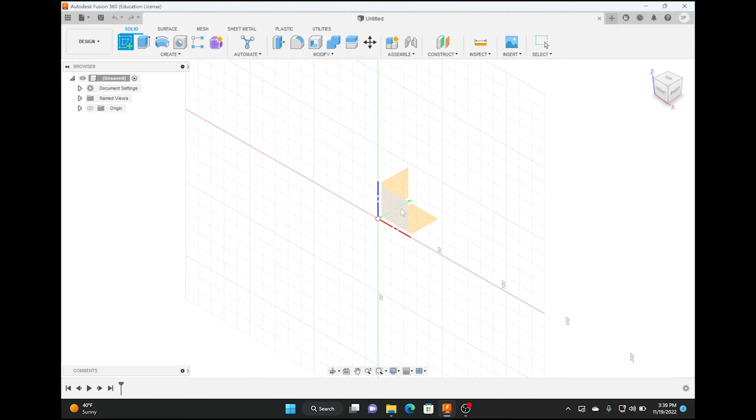First step in creating any design is to create a sketch. Choose a plane, any plane - I always prefer to work on this one for no particular reason. When creating a snowflake, I like to use polygons just because I feel like they look better. I like to use the measurement of 16 millimeters wide as a starting point, and then base every other measurement off of that.

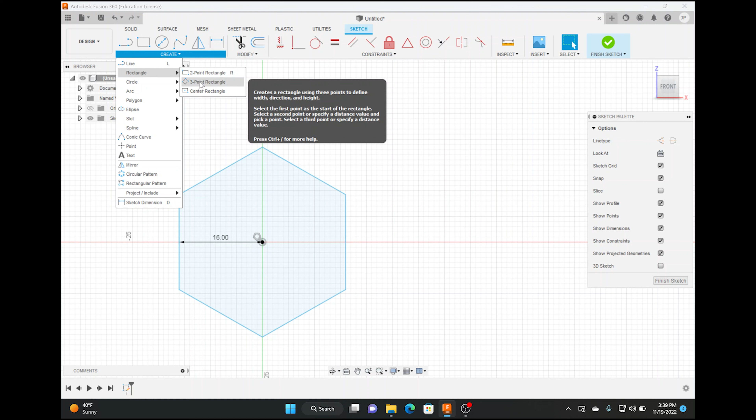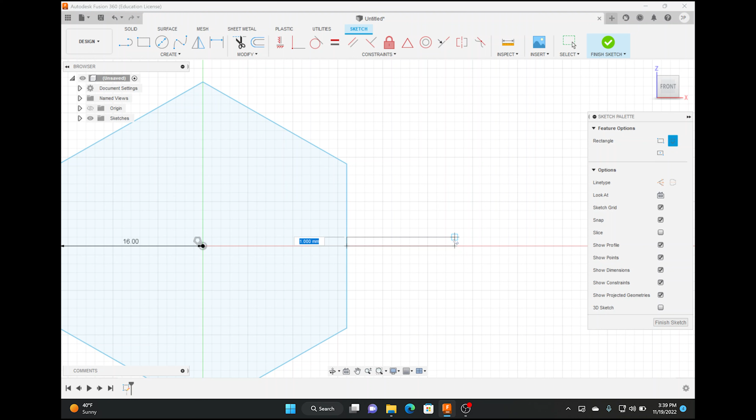To create the first leg of the snowflake, I create a three-point rectangle, because I like to start in the dead center of that hexagon - I want that to be my center point. So I go 12 millimeters out, based off the initial 16. Let me try that again: rectangle, three-point rectangle, 12. Go up 0.5, because it's going to be half of a leg before we mirror it. And now we have a leg.

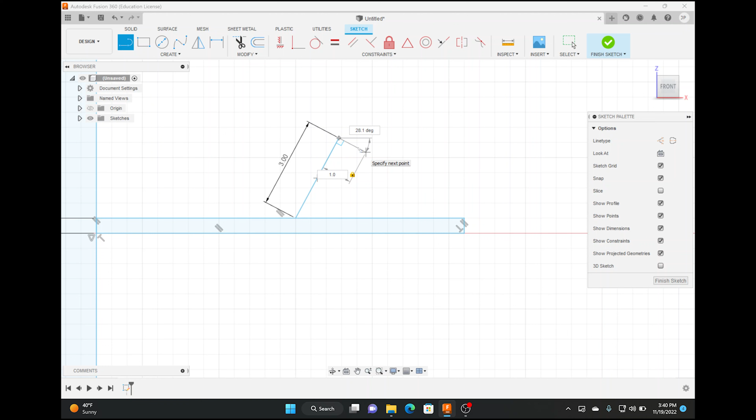Now, of course, you want to add some design to it, right? So let's add some little flourishes to that snowflake. We'll make this 3 millimeters just because why not? Make another line that is perpendicular to that, 1 millimeter - 1 millimeter being the length of all the legs and the flourishes. Again, you can do whatever you want, but that's how I do it. And again, a perpendicular line creating the first leg.

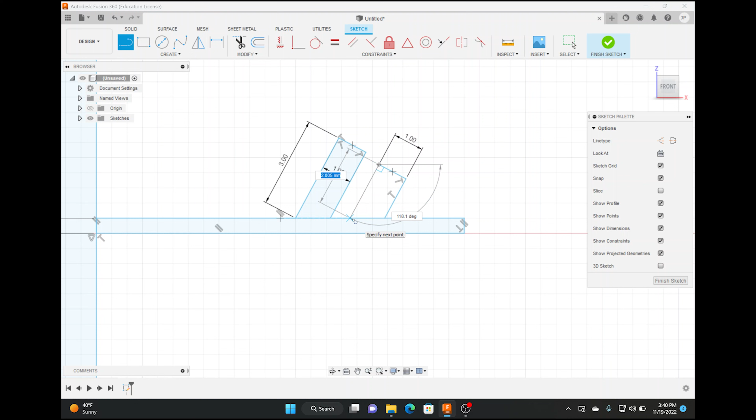Now, one leg isn't enough in my opinion, so let's do a second one. I'm going to keep this in parallel with the other one. Do another 1 millimeter line in width, and a line. Bring it down to the leg, arm, and there you go - quite simple. Now, of course, you can add as many as you want, do whatever you like, that's up to you, it's your design. But that is half of the leg for the snowflake.

So now I want to create it again on the other side. This is simple to do in terms of recreating it again if you wanted to, but let's say if this was more ornate and you didn't have to do it twice. So to keep it simple, we'll leave it as this here, but we're going to go to Create, we're going to go to Mirror.

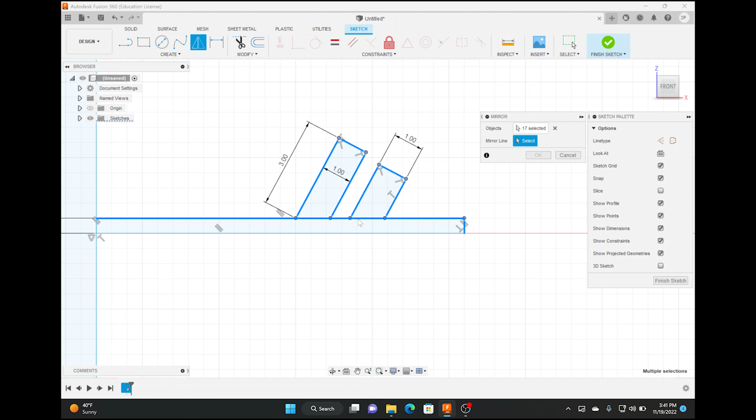We're going to highlight the objects that we want to mirror, or you can individually select them if you want. I prefer to just highlight them and then select whatever I don't need. The mirror line will be that middle line for that rectangle, or the bottom line of that rectangle. Once you select it, you'll get an idea as to what it's supposed to look like. If you like it, commit to it and hit OK. If you don't and say, oh wait, I wanted to add something else, go ahead and hit Cancel.

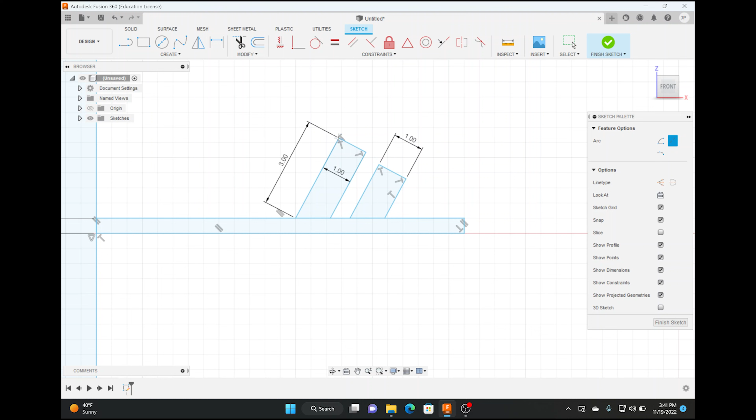So in this case here, I made a mistake - I wanted to add a little rounded tip or an arc to the top of these flourishes. So I'm going to do a 3-point arc: pick corner 1, pick corner 2, I pull it out till it locks in place. And there we go. Now I'm going to create another one on this one here - so let's do arc, 3-point arc, point 1, point 2. And there you have it.

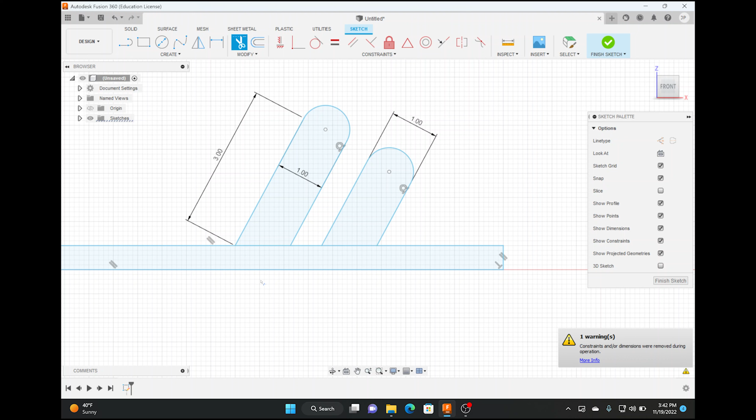Boom. Now, at this point, once I'm pretty satisfied with the way this looks, I like to modify the sketch and delete these lines that are no longer necessary. That way I don't have to do it later on for other reasons, even when I do the mirroring and when I do the patterns around the snowflake.

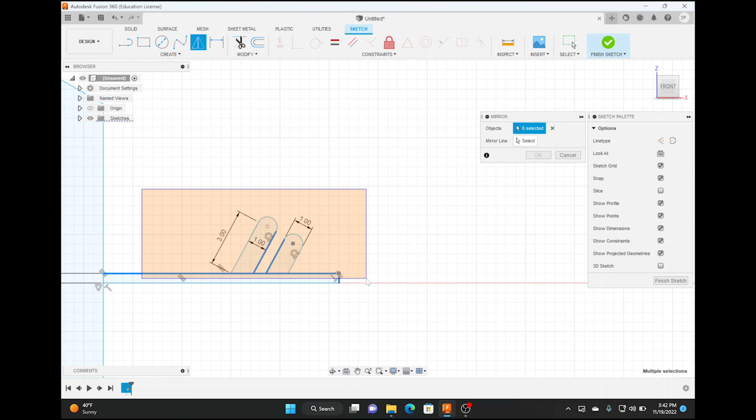So I'm satisfied with the way this looks, so we're going to go ahead and commit to that mirroring. Again, Create, Mirror, highlight what you want - my mouse is not cooperating correctly, so Control, click - that's all the things that I want to mirror. I'm going to go ahead and select that center line. I'm going to hit OK. And there you have it.

That is your first leg of a snowflake. And you can, again, design one half and mirror it to the other side. Now, obviously, this is great for a snowflake, but this can be used on so many different designs, especially when you need symmetrical looks on both sides. So I hope this helped. Any questions, let me know.